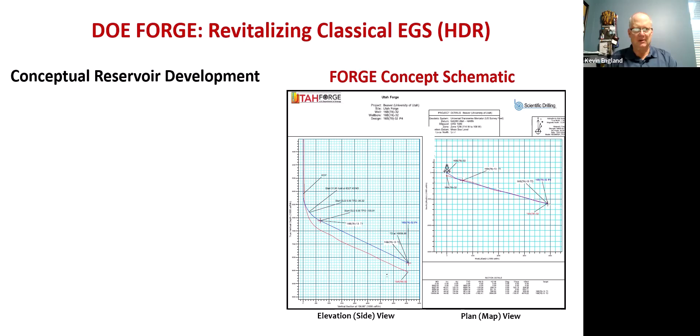Just as a quick background to get to where the fracturing phase happened this year: initially, there was a lot of work done at Forge to drill monitoring wells and understand the geology much better. The first thing done for the doublet that becomes the injection and production well was to drill injection well 16A 78-32, which I'll refer to as 16A, shown here in the red line. It was drilled at 65 degrees from vertical down to a depth of about 10,987 feet.

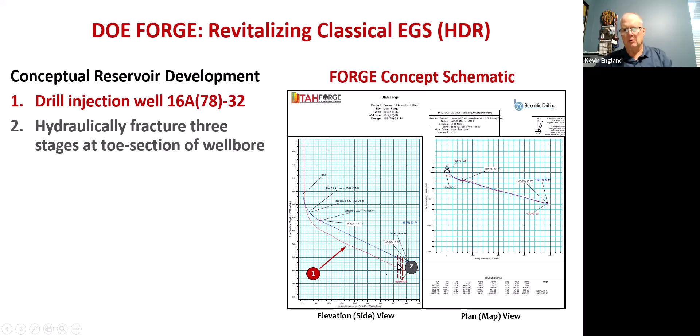In April of 2022, there were 3 frac stages pumped at the toe section of the 16A well - I'll talk more about those in the next slides. The purpose mainly was to understand the fracture propagation and geometry in order to place the 16B 78-32 production well, drilling it to intersect the microseismic cloud from the fractures generated from 16A.

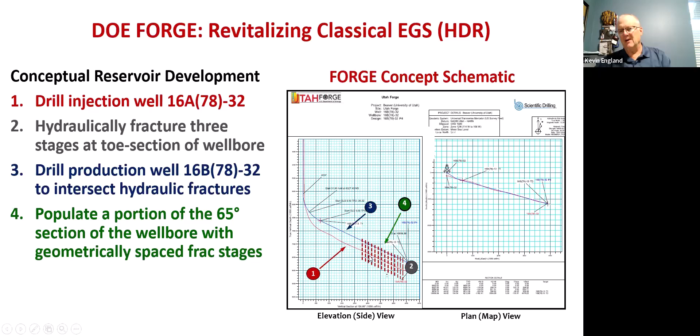Then in April of 2024, this year, there were 9 stages of fracturing performed in 16A and 4 stages of fracturing performed in 16B to provide the connections and evaluate the circulation potential between the injection and production wells.

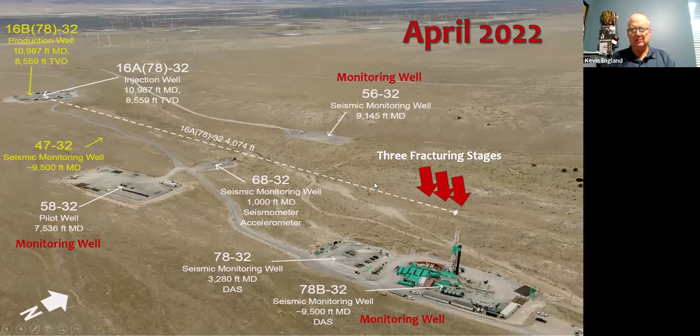This is just an overview of the Forge site. The 16A and 16B wells are both drilled from a single pad up here in the upper left. This is the projection of the 16A well out into space. You can see the offset wells, three used for microseismic monitoring, triangulated around the lateral so that we get good microseismic resolution on the hydraulic fractures that are created.

EGS is hot, so all of these wells, when you plot them on each other by true vertical depth, where we're stimulating we're definitely in the 390 degree to 430 degree Fahrenheit window.

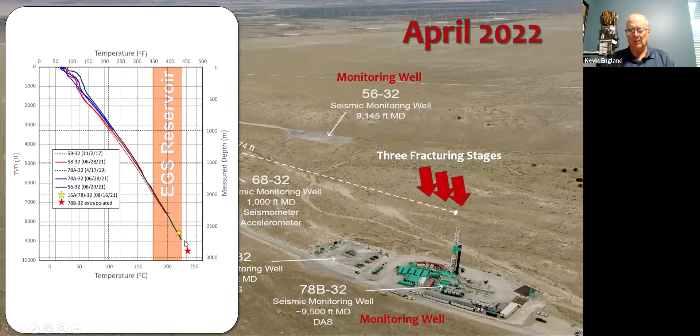Let's review the stages pumped in 2022, for reference, because when those were pumped the idea was to try and understand everything about the fracture initiation, the fracture propagation, and the general behavior of the fracture in the granitic formation.

The first stage was actually pumped in open hole. In the 16A well there's a 7-inch casing set, and then there was 200 feet of open hole below the casing shoe. The first stage was pumped in the open hole, and we stepped up the rate to a maximum of 50 barrels a minute, then stepped down at the end, all in an attempt to gather good data points on fracture behavior and get some idea on friction behavior at the end of the treatment.

When these stages were done, the wells were shut in and then flowed back for a period of time to reduce the wellhead pressure, because the isolation mechanism for the stages in 2022 were retrievable bridge plugs that were run and set on pipe.

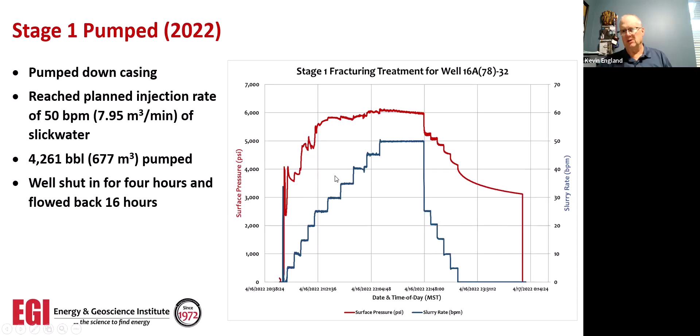Stage 2 was pumped through a perforated interval in the 7-inch casing. The rate was 35 barrels a minute max. You can see at the different steps the pressure behaviors.

We did 2 planned shutdowns, one initially when we got to the initial rate of 5 barrels a minute, and one when we were at the maximum rate of 35 barrels a minute, again in order to understand the fracture behavior and get some good data on the net pressure being developed in the fracture system.

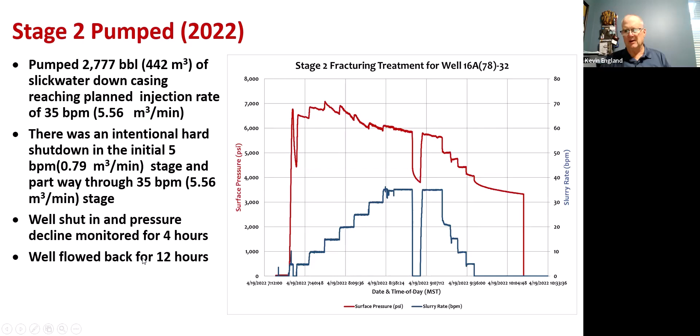Pressure was monitored again, and the well was flowed back so the next bridge plug could be set. The first 2 stages were pumped with slick water.

Stage 3, we actually pumped cross-link CMHPG fluid, and we did pump some proppant. This is in order to try and get an idea if there were any potential entry issues into the fracture by putting solids into the fluid.

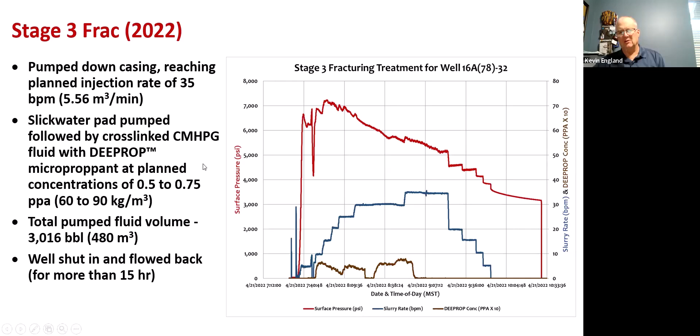So in 2022, there was no proppant pumped in any of these frac stages other than the DEEPROP that was pumped in stage 3. The reason for that is the mission was to get an idea on the fracture geometry behavior and all the fracture properties, and not to risk screen out during these stages, so that all the data that was intended to be collected could be collected.

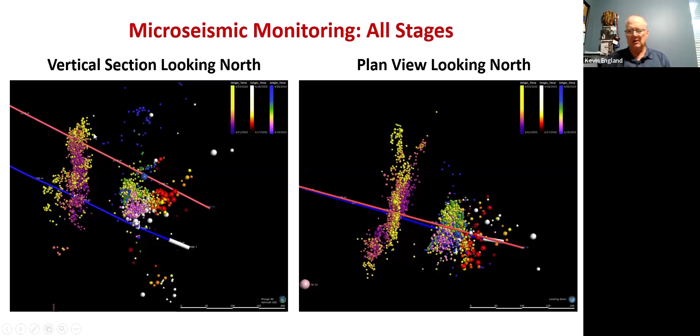Based on the location of those events, the plan for 16B well was to drill a trajectory that would intersect those microseismic events. In fact, that was done last year, 16B was drilled, and in the deviated section, the 65-degree lateral section, it is parallel to the 16A well, positioned 300 feet vertically above it.

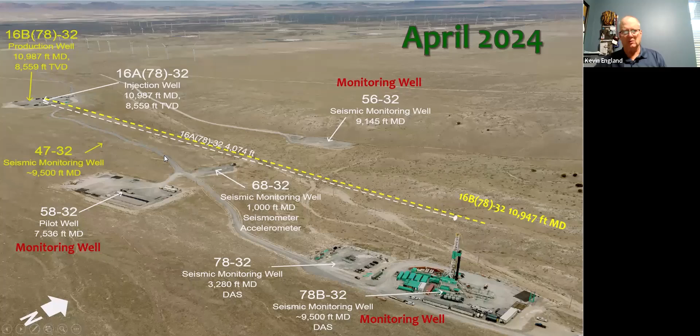Monitoring wells are the same for the treatments done in April of this year. One thing different on 16B is that there was fiber optic cable run along the outside of the casing and cemented on the 7-inch casing of the 16B well.

There are 2 fiber optic cables that terminate down near the casing shoe. One is basically Shell and UT Austin fiber, part of the R&D initiative, and the second one is Silixa and Rice University. The third fiber optic line was for a ported pressure temperature gauge into the 7-inch casing with a Baker gauge carrier and apparatus.

For research purposes, there are a lot of things that get implemented into any of the programs done at Forge. One that I won't talk about but is highlighted here is there was a test bridge plug run in the 16B well during stimulation, developed by PetroQuip as part of an R&D project done for Forge.

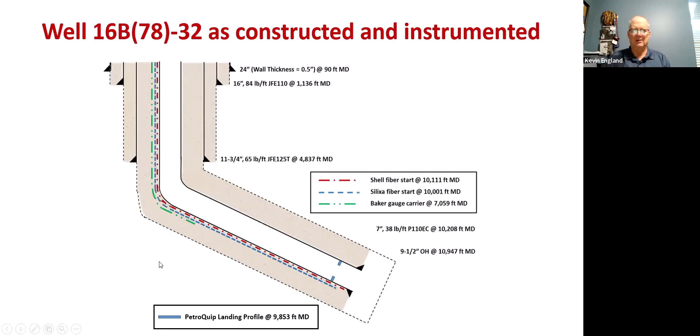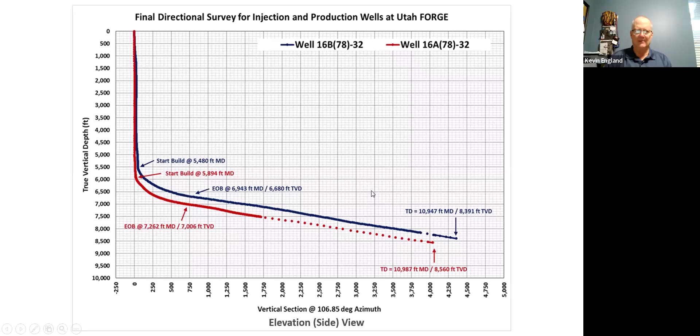One of the primary missions at Forge is observing and understanding induced seismicity with all the operations that occur at Forge. So primarily for the hydraulic fracturing treatments and the flow back and any circulation that's done, there's a traffic light system that's in place.

Basically, the observations that are made, the data that is analyzed, the events that are identified, and the magnitudes all have to meet criteria for the traffic light system. There's a green, a yellow, and a red level by which different actions accordingly have to be taken. The bottom line for the stimulation done this year is that we did not exceed any of the alarms and stayed in the green the entire time.

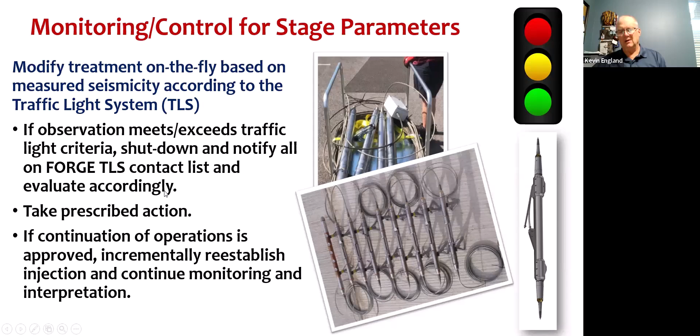So let's move to the stimulation that was done this year on the 16A well first. The 16A well, the injection well, was done first.

Remember, the 16B well has fiber optic on the outside of the casing, and then we have the 3 offset monitoring wells for microseismic, plus other different monitoring stations around the site to record all the events that happen during stimulation.

The basic plan for Forge is not to do cookbook or repetitive stage type designs. Each stage is designed with some variable in mind in order to try and understand how that impacts the ultimate fracture initiation, propagation, and eventually connection behavior between the 2 wells.

Stage 3R here is actually the first stage that was pumped, and it is a refrac of the 3 stages that were done in 2022, and this time added proppant. So we refraced the 3 stages from 2022 and added proppant.

The proppant in all cases here was start out with 100 mesh and then finish up with 40/70 mesh sand. It was all silica sand used in these treatments.

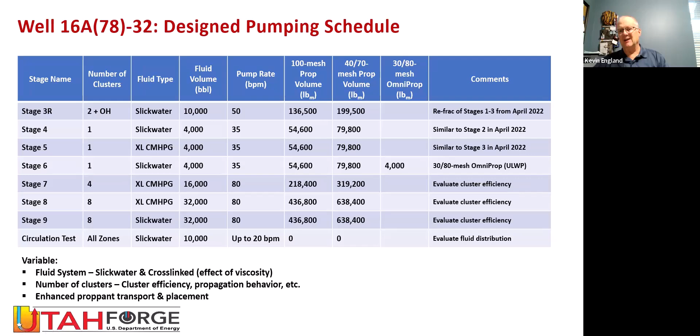Then the enhanced proppant transport and placement, stage 6, was designed by adding some ultra lightweight proppant material, 30/80 mesh OmniProp, to try and facilitate better proppant transport, better proppant placement, and overall better fracture conductivity connection between the injection and production wells.

So from the design, you can see these are the 3 stages from 2022, stage 1, 2, and 3, that were lumped together as 3R for refrac. The plan is stage 4, 5, 6 being single clusters, stage 7, 4 clusters, and stages 8 and 9 being 8 clusters.

One point to mention here: these wells are deviated at 65 degrees. And from a fracturing standpoint, I know everybody knows the challenges that can impose on fracture initiation and fracture behavior when trying to initiate from deviated wellbores.

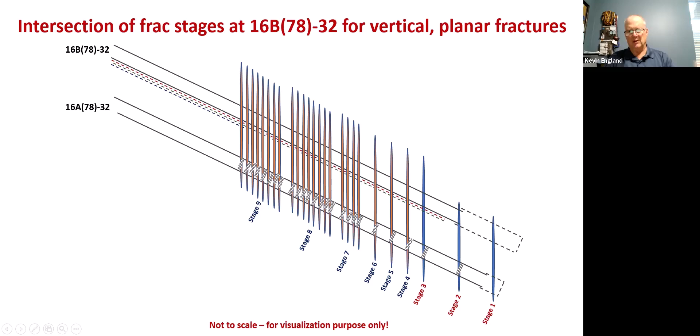So I tried to make it a little simpler and say this is the same picture, but laid out horizontally or flat, showing the different stage locations here in depth. What these depths represent is if the fracture initiates and connects with a planar vertical fracture between wellbores. Just for reference, this would be the depth directly vertically above the injection well and the production well, in the B well. So this shows what things would look like if everything were perfect.

Now, from another evaluation standpoint, we pumped actually 3 different types of tracers in the program. One was provided by the University of Utah, the Energy and Geosciences Institute, which were water-soluble tracers. The other two: one was supplied by Quantum Pro, the nanoparticle tracers, and Resman with water-soluble tracers.

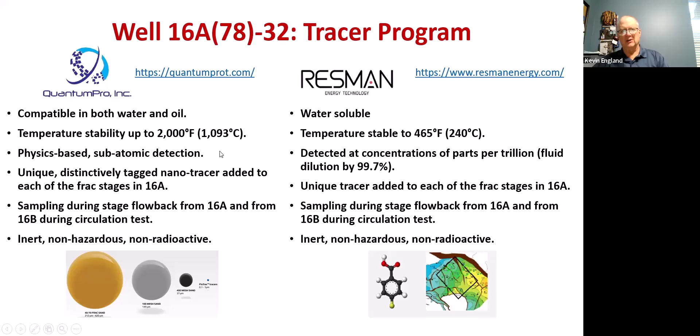A unique tracer was pumped in every stage of fracturing by both Quantum Pro and Resman. We'll also talk a little about a circulation test that was done post-stimulation, and all of those circulation steps also had unique tracers placed in them.

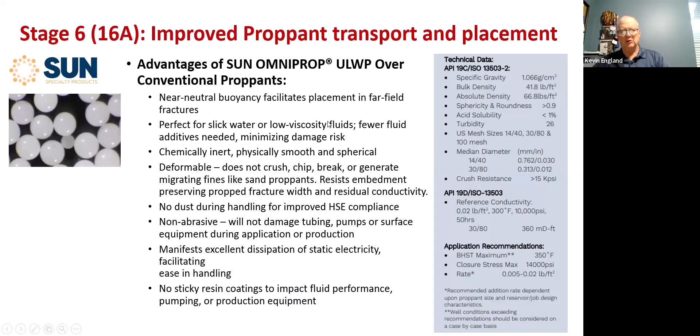Now, I mentioned the ultra lightweight proppant. This is just details on the specs of the proppant - it's very ultra low density. The idea was to put this ultra prop, or omniprop, in with the proppant being pumped in stage 6, hoping that it would facilitate better transport and also hinder and provide less settling in the fracture, for better overall proppant placement between the injection well and the production well.

Depending on the stage it gets pumped on, we don't know how far out in the fracture the system will go before it experiences the temperatures that will cause it to degrade very rapidly. But mainly this was an attempt to look at the impact on fracture initiation, and probably a bit on the connection and the ability to get proppant entry into the fracture connected to the wellbore, based on the fact that the wellbore is deviated at 65 degrees.

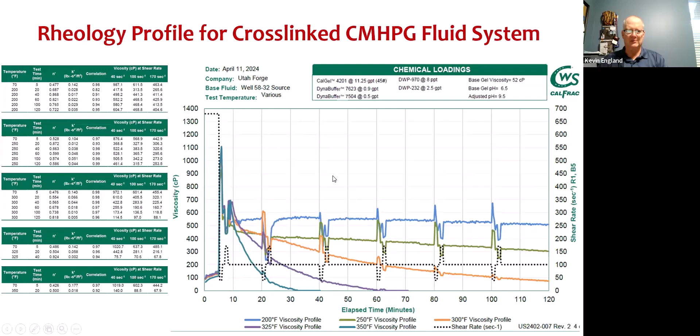So I'm going to go through the individual stages on 16A here. 16A was done by pump down plug and gun method, following the similar procedures that are done every day in unconventional oil and gas: pump the plug and guns down, followed by pumping the subsequent stage, and repeating that process until all the stages are completed.

And this stage treated very, very well. Towards the end it got a little tight, but we have the maximum allowable surface treating pressure of 8,000 psi. So we were able to get all the proppant pumped, cut the proppant, and easily flushed underneath the maximum allowable pressure.

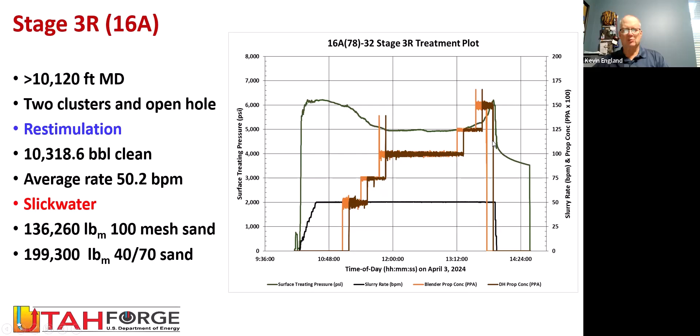So stage 4, single cluster. This was again a slick water treatment, kind of a similar design, similar treatment to what was pumped in stage 2 in 2022, except this time we're pumping proppant.

One thing I'll mention on all the plots you'll see is that initially when starting the stage, we're pumping at a low rate because the ball for the frac plug wasn't run with the plug. We dropped it from surface after the plug was set, so this is basically pumping the ball the rest of the way down and getting it seated onto the frac plug, then breaking down the formation and starting the actual frac stage. This was done as a safety mitigation in case there was no way to break down the formation, or we had trouble with the guns and needed to run more guns. We wanted to make sure we still had a way to pump into the well before the ball got landed on top of the plug.

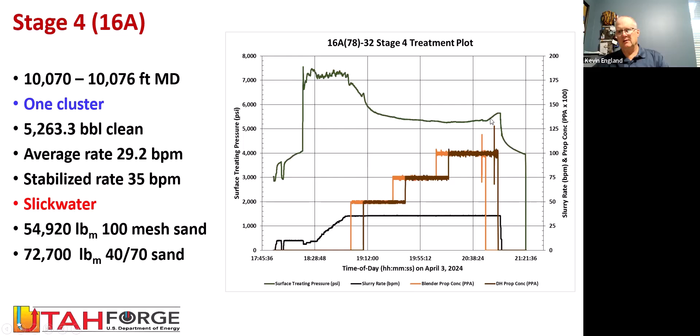So this stage, again slick water, pumping along as planned, and placing the amount of proppant that was intended.

So stage 5, very similar to stage 4, single cluster, this time with crosslink CMHPG. A little bit different behavior in some regards - it takes some time to get the rate up to design rate just because of the max pressure limitation, but staying with a good safety margin, we get up to rate before proppant started.

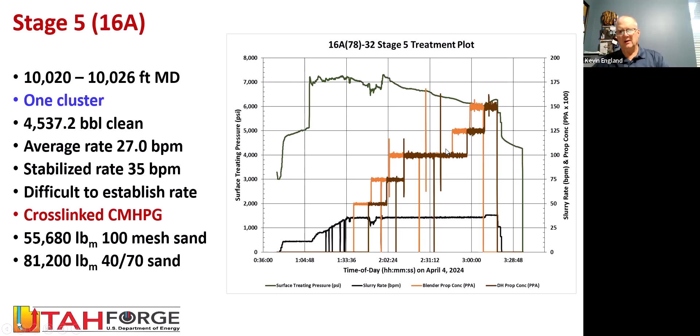This one treated normally, except there's always going to be some issues in some of these plots that are under evaluation to figure out what kind of artifact this was - was it a surface artifact, was it a downhole artifact? All of those evaluations are still currently in progress. But the stage went according to plan, and all the proppant was pumped.

So then stage 6 comes along. This is a single cluster, basically very similar to stage 4 with slick water, single cluster. This is where we intended to pump the ultra lightweight proppant, the Omni prop.

Initially when trying to start the treatment, we're basically just pressure testing the casing to some degree, and finally we get a little bit of a break here and start to initiate, start to get some rate. Remember that even though we're pumping in at very low rates into the formation, there's no matrix flow in this granite, so anytime we're pumping into the formation, we're fracking the formation - but here, albeit at very, very low pump rate.

We continued to do that and worked until we got the rate up finally to about 11.5 barrels a minute. We actually increased the maximum allowable pressure to 8,500 for this treatment. But at the end, after pumping for about 3.5 hours, there wasn't really any way to start pumping proppant at this point, so we decided to shut down.

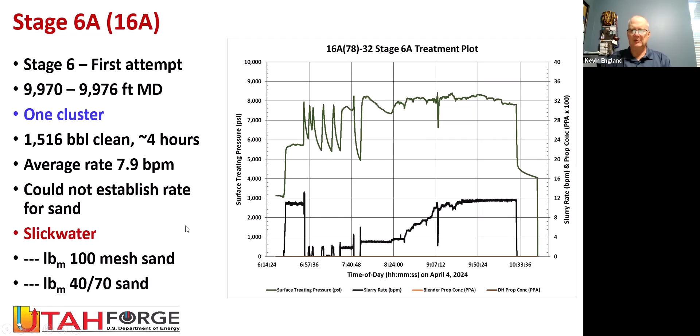In the meantime, we had been looking at some of the logs, some of the geology features. What we decided to do was go down and add another cluster. Also, in 2022, the perforations were designed to be placed where formation image logs indicated the highest presence of natural fractures, drilling induced fractures, or even thermally induced fractures - selected to be at a place where it looked like there was some fracturing occurring at the wellbore.

In 2024, all of these perforation clusters are just geometrically placed - based on a set spacing, with no consideration for whether or not that cluster sits in proximity to natural fractures. So in looking at the logs, we found that the cluster from the previous attempt had no indication of natural fractures. So we added a cluster to this stage where there was presence of natural fractures.

When we started pumping again, bottom line is we really didn't get much of a different result. A little bit more rate, if 11 to 16 barrels a minute is more rate, but again, pressure-wise, we're just not able to start pumping any proppant without for sure probably screening out.

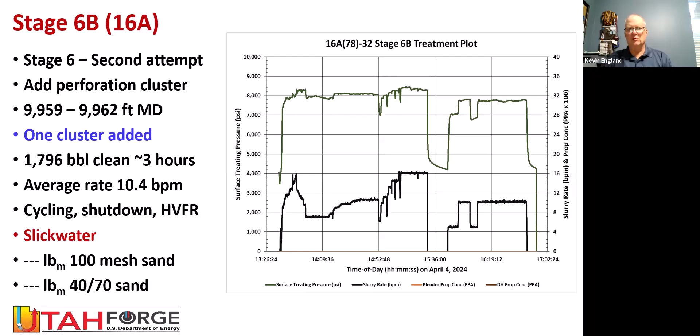So at this point, we decided to move on to stage 7, which was designed to be 4 clusters. We actually changed it to 3 clusters because of the extra gun used for stage 6. Here you see a haunting repeat, trying to build rate but being at maximum pumping pressure the entire time. This is concerning because now we're really not able to get good fracture propagation or pumping conditions.

This time we pumped for over 8 hours, trying to finally see if something would break and we would get fracture propagation. But it never happened, so we decided to shut down.

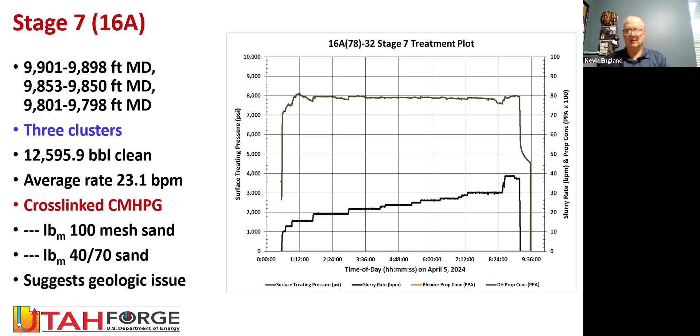So this is just a clue, something that popped out but is under further investigation, trying to revise possibly the geomechanics evaluations for future stimulations at Forge, because we definitely want to understand and avoid these kinds of situations.

So we moved on to stage 8, now with 8 clusters. And I'll point out stage 8 would have been back in the area where we were outside of the anomaly from the spectral gamma ray log.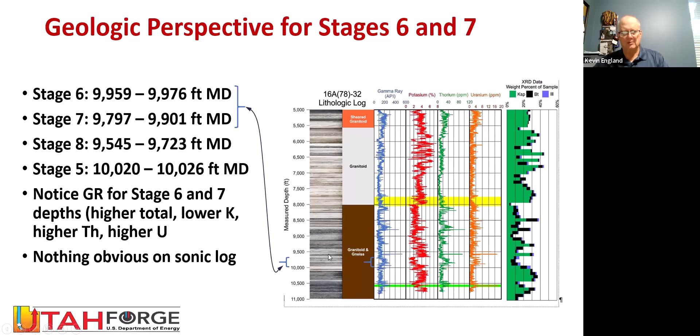So, crosslink CMHPG, 80 barrels a minute. This job was really uneventful, 8 hours of pumping. We had one incident where sand delivery became an issue, but we modified and got everything back on track, ending up pumping over 1 million pounds of proppant on this single stage through these 8 clusters.

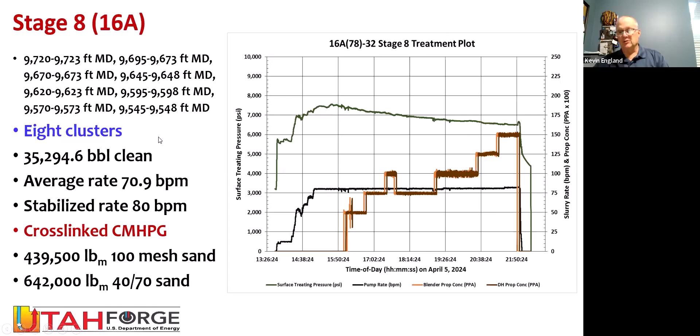So, back on track, we set the plug and went to stage 9. The only difference between stage 9 and stage 8 is the fluid — instead of crosslink, we're back to slick water.

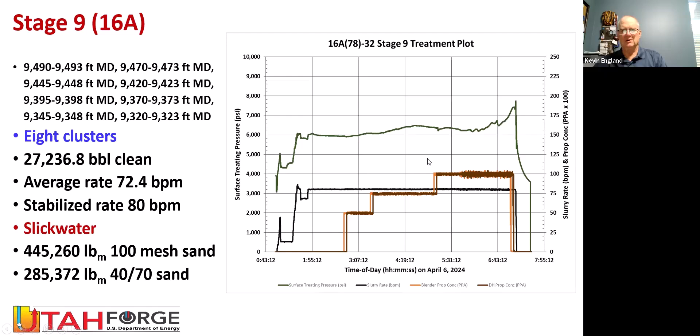Again, everything was treating fine. When we got into the one pound stage, partway through, pressure started to increase, a little bit of a break, but then pressure kept increasing to the point where we had to cut proppant a bit short. So we didn't get to the 1.25 or 1.5 pound proppant stages, but we still pumped over 700,000 pounds of proppant. This may be a key indicator that the viscosity at the wellbore could be affecting the entry of proppant into the fracture system.

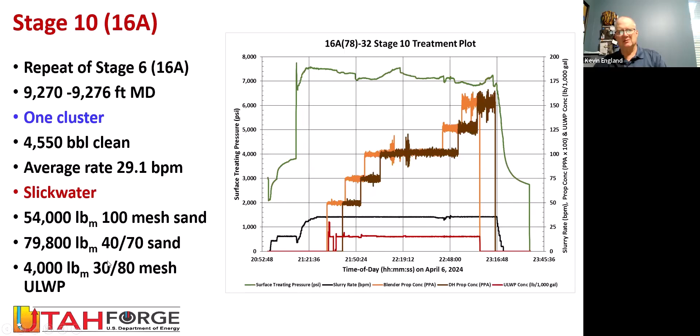Stage 10 was added to the program because stage 6 couldn't be pumped, and that's where we wanted to pump the omniprop. So we added stage 10, a single cluster, slick water, same design as stage 6, and ended up pumping the job to completion. The omniprop was added at a consistent concentration throughout the proppant stage, across the 100 mesh and 40/70 mesh proppant stages. A total of 4,000 pounds of 30/80 mesh ultra lightweight proppant was pumped.

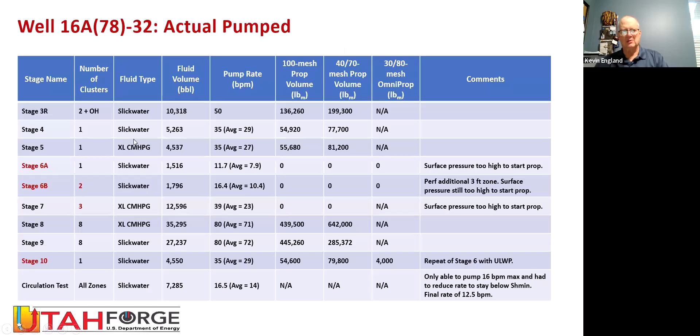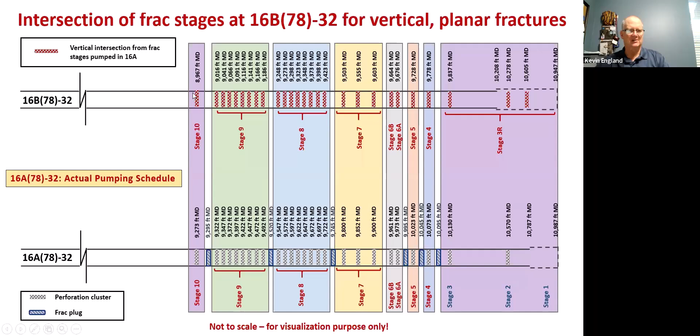This is just a summary of what actually happened, so it can be compared to the design schedule. And this is the same map, but including the change in number of clusters on stage 7, the extra cluster added on stage 6, and adding stage 10 to the figure.

So all during this time, we're monitoring all of the frac hits occurring at the 16B well during all the stages of fracturing at 16A.

Importantly, this was done on the fly in real time, because the intervals where we wanted to perforate 16B had to be identified beforehand — the guns for this well were run TCP, and the guns were being loaded in Bakersfield. So we had to get the information on where the perforated intervals would be so the guns could be loaded, the spacer tubes installed, and the gun systems brought to Forge in order to run for each of the subsequent stages pumped on the 16B well.

Unfortunately, with the time, we won't go into a lot of detail on the fiber optic, but it was instrumental and provided really valuable information all through the program that was done in April. This gets done a lot in unconventional oil and gas and other places, and this is courtesy of Neubrex, who were doing the interrogation and interpretation of the strain.

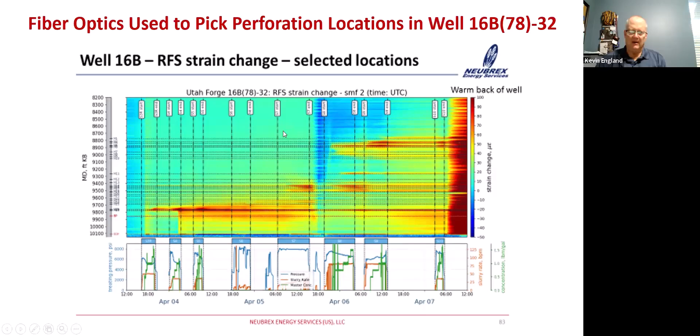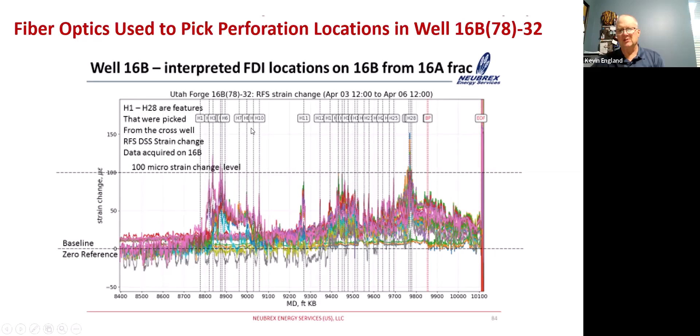At the end, here's a simple plot of the interpreted frac hits, locations on the 16B wellbore. We ended up picking about 28 of the best identified fracture hits. We only had 20 guns available, so we went through a process to determine which of these would be selected for being actually perforated and stimulated in 16B, based on one thing: this kind of look.

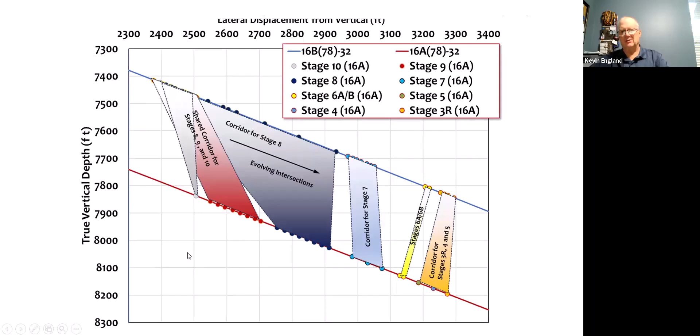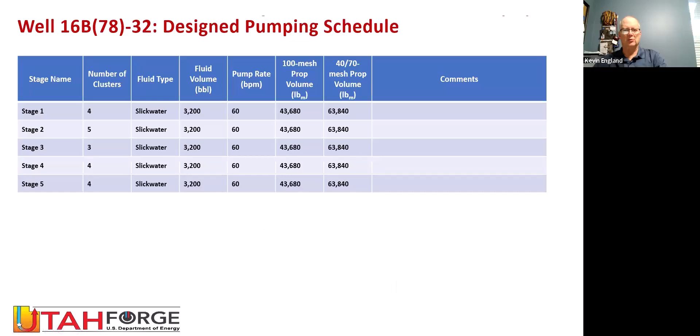But based on this, we determined that we would have to divide into 5 frac stages for 16B in order to try and accommodate where the fracture hits actually were, and to use these fracture stages to enhance and improve the connection between the A and the B well. So again, on the cartoon, this is what it actually looks like in terms of stages 1, 2, 3, 4, and 5. These are the proposed and the actual perforated intervals for the stages that were pumped on the 16B well.

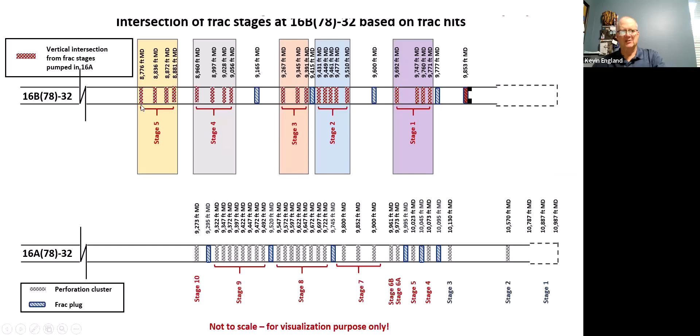So let's look at the behavior of the fractures on the 16B well. All of these are going to be slick water treatments. The first stage was 4 clusters. The intent was to pump all of these jobs at 60 barrels a minute. You can see the rate was achieved, the proppant was pumped as planned, and there were no real anomalies, other than the fact that, as you'll notice on all the frac stages in 16B, there's this initial early pressure drop that always occurred, and quite a pressure drop. The idea here is that this may be the point where the initiation of the fracture from the 16B well achieved a really good intersection with the fractures that were in place from the 16A well.

Stage 2 was 5 clusters with slick water. Again, there's a lot of things that look different in each of these stages, but for the most part, all of them were pumped as per the schedule. On this one, we actually tried to pump a bit more proppant and see what would happen. And actually, more proppant just looked like it started to reach a case where we were probably going to end up screening out. So we cut proppant and flushed everything.

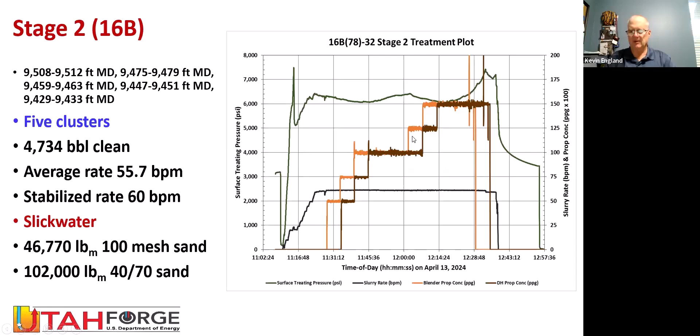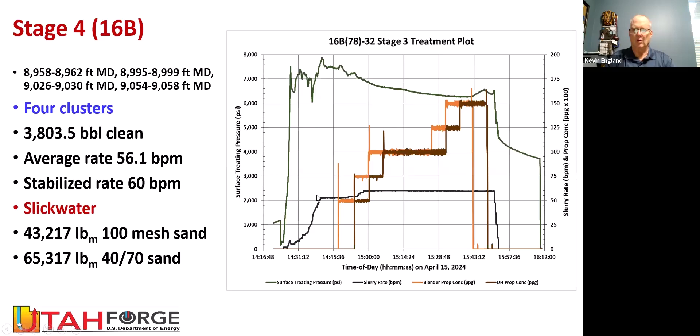Stage 3 was 3 clusters. Again, this was a pretty undramatic stage. Stage 4, really kind of the same thing. So all the stages from the 16B well went according to the design.

Unfortunately, for stage 5, it was only perforated because we ran out of frac plugs due to some failures with some of the plugs that were run. We ran out of frac plugs and didn't have a way to isolate for stage 5, so we just perforated stage 5 without fracturing. That gives a good opportunity to note the guns used for perforating the B well had to be oriented because of the fiber optic on the outside of the casing.

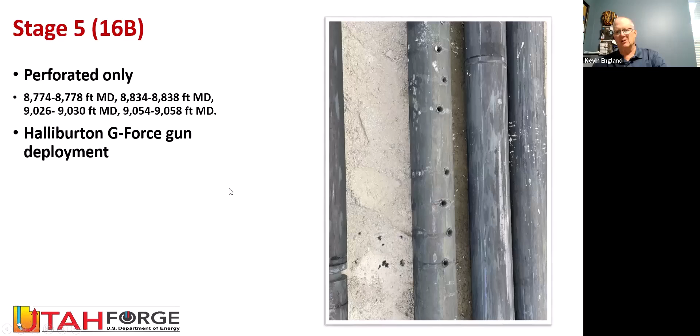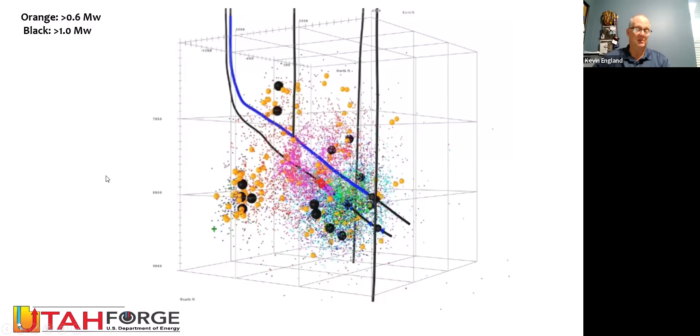So this is the actual pump schedule for the 16B well. And microseismically, waiting for the final catalog of events, but basically all of the stages show up pretty well. When you get this in a way you can rotate it, there were a few events above magnitude 1, these black balls. I think the maximum event the whole time was 1.9. But again, none of the traffic light system alerts were exceeded, so induced seismicity wise, everything was very successful during the stimulation.

So I wanted to save a little bit of time at the end. That's the fracturing summary for the different stages for the different wells.

But a couple of months ago, we went back out to Forge and did a circulation test between the wells after the fracture stimulation was done, and of course after all the plugs were drilled out. This is kind of the goal of the stimulation: to connect these wells and be able to circulate very efficiently between the injection and production well.

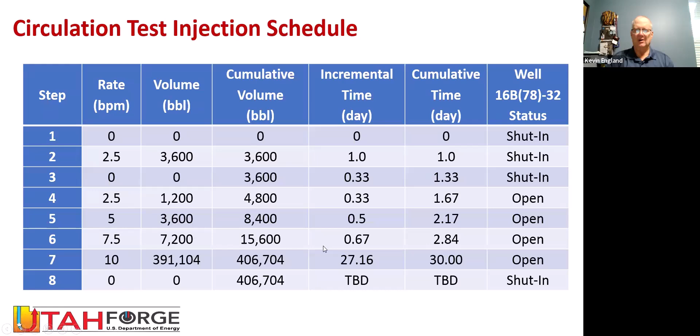From an overview, I'll show more detail on the pad itself. This is the injection schedule that was followed: started out at 2.5 barrels a minute for a day to generate some initial transient analysis in the reservoir, shut down for 8 hours, then sequentially increased the rate up to 10 barrels a minute, which remained the rate for the next 28 days of pumping.

The simple setup was to use a 125,000 barrel pit, basically well water from one of the offset pads on a water well that Forge has. We added chemical additives to treat for corrosion and scale inhibition. We used frac pumps in this case to pump the 30-day treatment.

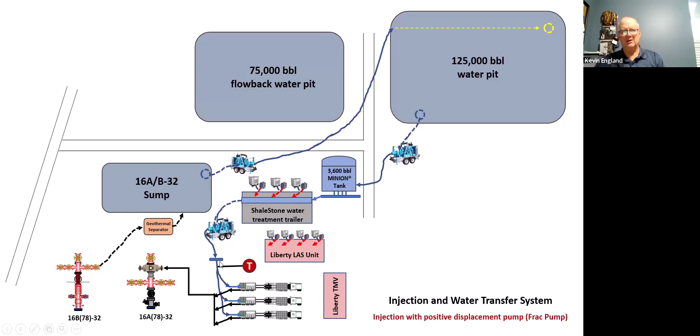We pumped into well 16A, it flowed out of well 16B, through a geothermal separator, an atmospheric separator, and flowed back into a sump. Then we transferred this water back to the 125,000 barrel pit and used that for the circulation the entire 30 days.

So the intent is to know what you're injecting into 16A as it goes down and up through the fracture system that connects, to understand what comes out of 16B before it goes into the separator. Then when it goes into the flash separator, it obviously flashes steam and drops out the remaining water which flows out to the sump.

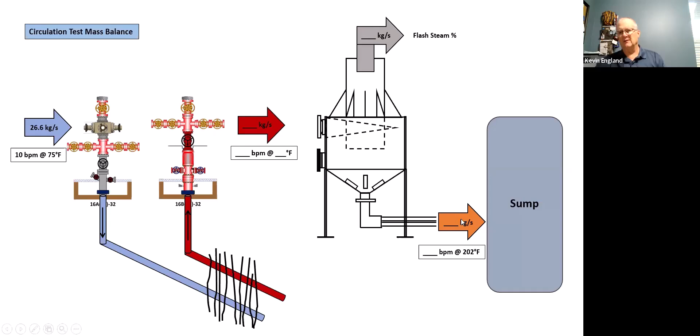Instrumentation wise, we put all flow meters, pressure transducers, temperature probes, sampling ports - significant effort was made to collect all the necessary data to understand how the system was behaving throughout, and to take a lot of samples for different types of analysis, primarily for tracer analysis, but also for other understanding of water chemistry, geochemistry, and things like that.

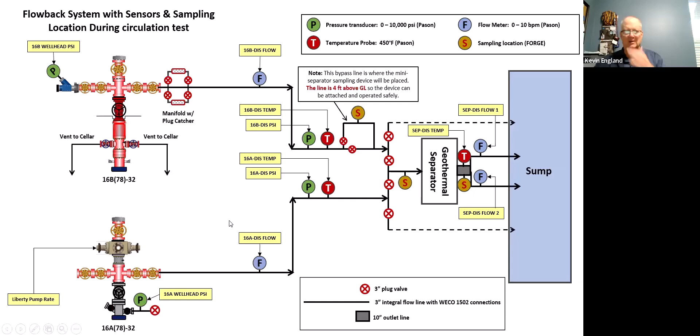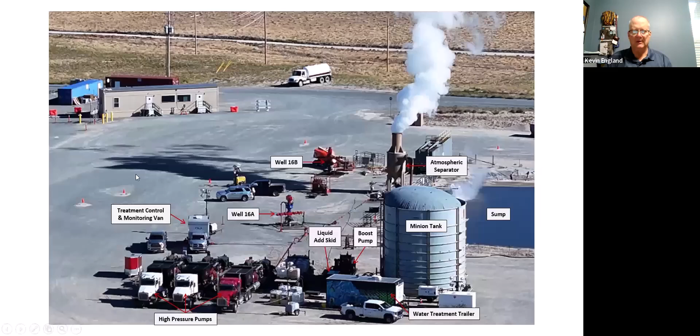This is how it was actually set up - just to see the actual setup: the pumps, the 16A injection well, the 16B production well, the separator, the sump, and then all of the associated equipment back behind here to transfer back to the 125,000 barrel pit and continue the circulation. So a very overview summary.

I didn't mention, I took out for time's sake, there was a 9-hour circulation test done immediately after fracturing. However, the result was that the efficiency was getting better over time, and the main reason is because during the frac treatments we injected about 130,000 barrels of fluid into the reservoir to create the fracture system. But to drill out the plugs using the workover rigs, we had to flow back about 70,000 barrels of that fluid in order to meet pressure and safety conditions at surface so we could safely drill out the frac plugs with the workover rig.

So most of this 9-hour circulation test was simply recharging the system because we had flowed back so much of the water out of it. So the long-term circulation was 10 barrels a minute between the wells for almost 30 days.

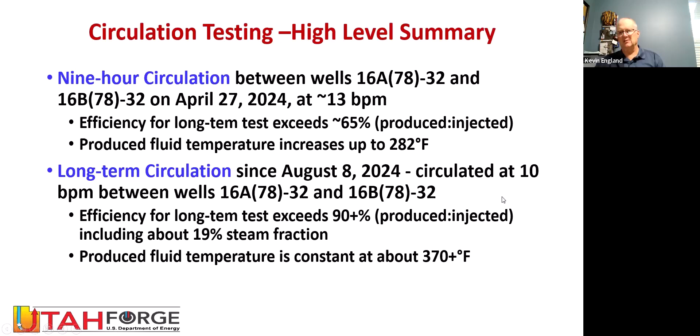The efficiency was approaching and exceeded about 90%. So 90% of what we were injecting into 16A was being produced out of 16B. Steam fraction was about 19%, and the produced fluid temperature for the last few days was constant at 370 degrees Fahrenheit and above.

We ran production logs also during the long-term circulation test. There's a lot of data and reports on this, but when you look at the contribution of injected fluid into the different frac stages, stage 10, stage 9, and stage 8 all show very high contribution. Stage 7 and stage 6, which didn't get any proppant pumped into them, actually showed no injectivity. Stage 5 showed a small amount of injectivity, and the log only got down to just below stage 5, so stage 4 and everything for stage 3R is lumped together as 26%.

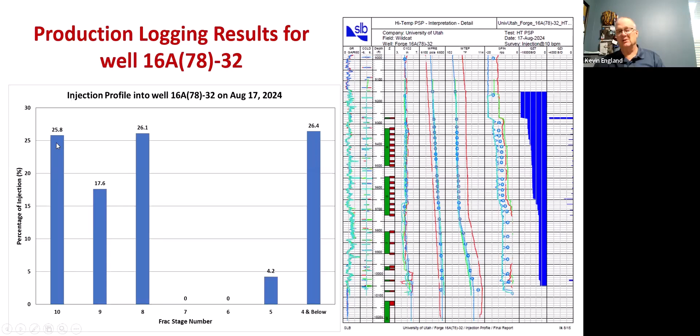One thing I didn't get to do here was note that this looks really low, of course, but this is a single cluster. These are 8 clusters, and stage 10 is a single cluster. But when you look at the data, there's a lot of evidence that these two are connected to the same fairway. So it may just be an artifact, but it may also have something to do with the fact that this was the test case for the ultra lightweight proppant.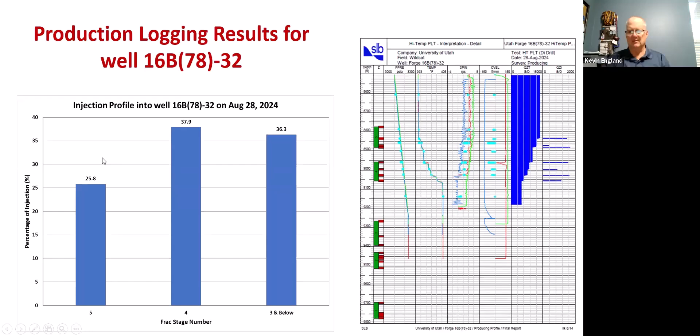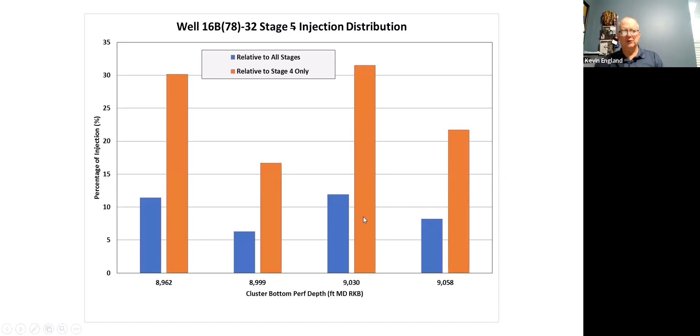The good news is all of the data and reports are available to anyone who wants to download. Go to the Geothermal Data Repository, the GDR, or the University of Utah Forge Wiki site and download any and all of the data that we've looked at, and a whole lot more.

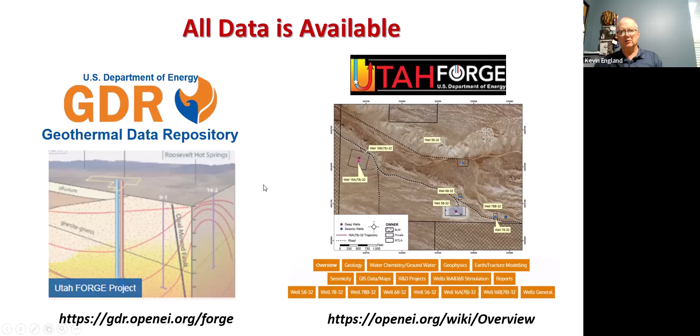Thank you, Kevin. Great project and great overview. We do have a few questions. Claudio is interested whether or not any DFITs were run on this particular frac campaign.

Well, not in this particular work here. There were some initial injection tests done on 16A when it was first completed, and I think John, you did those - they were in 2019, 2020, and there are data and papers available on all of that. So there was a DFIT run in the open hole section. And in 2022, there were a couple of shut-ins before proppant and after proppant that might be useful to look at.

John's question is: any thoughts on the amount of leak off seen at the end of each stage? Seems like granite would not leak off, but pressure does come down fairly quickly after pumping stops.